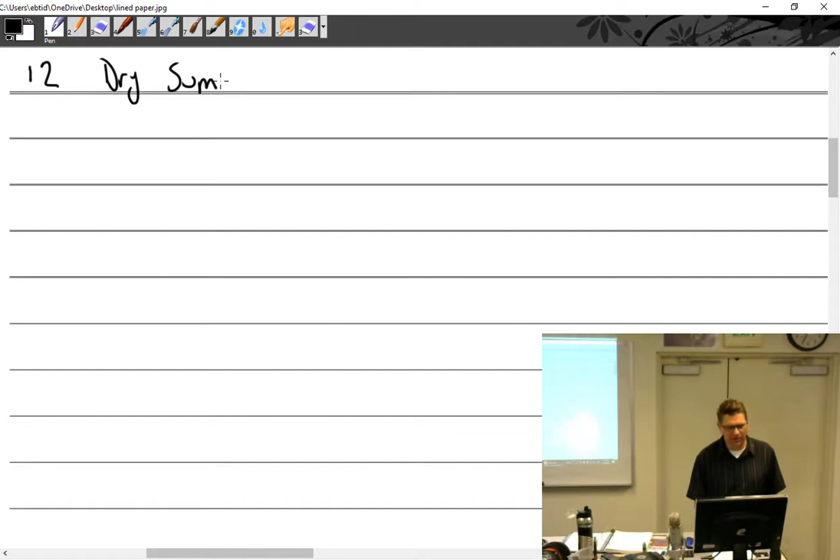We talked last week about the fact that a dry sump engine is distinguished from a wet sump. In a wet sump, all of the oil is just down below the engine in the sump. In a dry sump, you still have a sump, but you have a scavenge pump that scavenges all the oil out of it and sends it to a tank located usually on the firewall, a remote one. So the majority of the oil is not there underneath the engine.

We talked about reasons why we do this. Number one, it could be a radial engine. What's on the bottom of a radial? Cylinders, right? That'd be a bad place to put a sump. You have cylinders right there, or like the V-tail Bonanza, or some engines where the landing gear comes up next to it.

So we got that. Now, what about the oil tank? Dry sump engine, we'll just do this: oil tank.

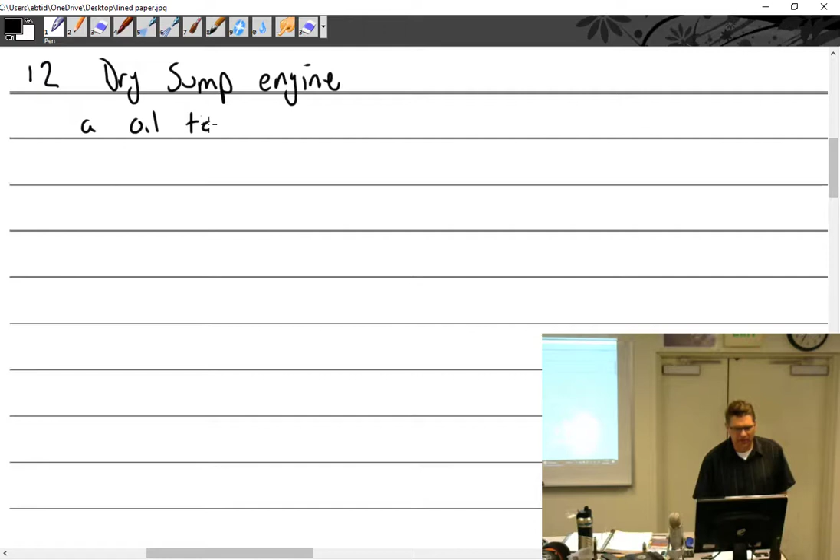Uh-oh, where's Janet? She was feeling sick.

Oil tank is mounted. What's that?

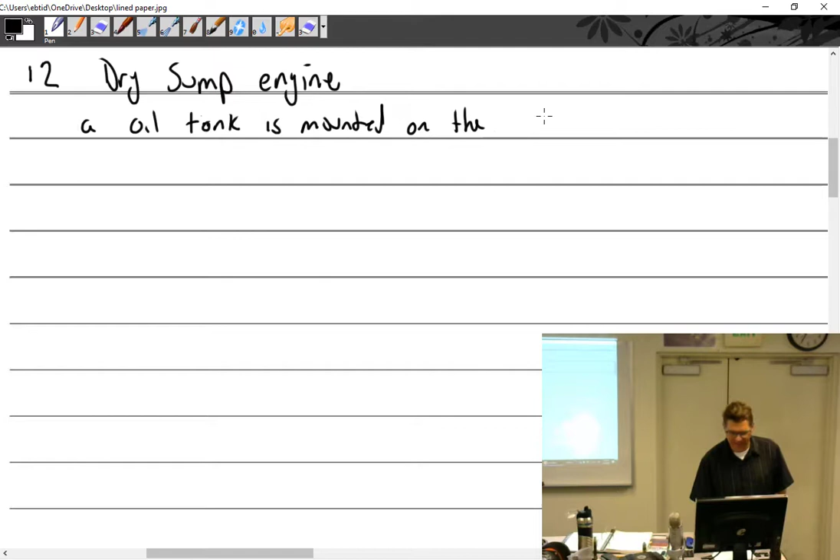Now you're going to be writing hella fast. I know, because you can just pause it. You can pause it, right, Janet? She's like, oh, yeah, I can.

All right, the oil tank is mounted on the firewall. Of course, you can have one for each engine. It's not just one big oil tank that goes out to multiple engines. That would be a huge mistake to do that, wouldn't it?

Why would it be a huge mistake if I had a twin-engine aircraft, like a radial - is that a Lockheed Electra or a Beech 18? It's a Beech 18. How can you tell? All I know is confidence is key.

So why would I not just, for the sake of simplicity, put one big oil tank right up front? You'd lose both engines. Single point of failure - if you lost the oil, you would lose both engines. That's good. What else?

It does not seem very effective to put it all the way up at the nose and have the engine on the wings. It doesn't make sense to pump it all the way down, across, and over. Any time you'd have a problem with an oil line, you could lose all the oil for both engines, and then you'd fly all the way to the crash site.

And the other thing is, what if one engine was going out? You're seizing up a bearing in it and making massive amounts of metal. That metal goes to the oil tank, and that oil goes to the other engine. So you want to keep them totally separate.

By the way, I watched a really good documentary this weekend about the search for Amelia Earhart. I thought it was going to be stupid, but it was really good, I really liked it. Was it on Hulu? Oh no, we have Disney Plus now too, that's where it was, I think it was Disney Plus. It was a National Geographic thing. Yeah, I paid for that too.

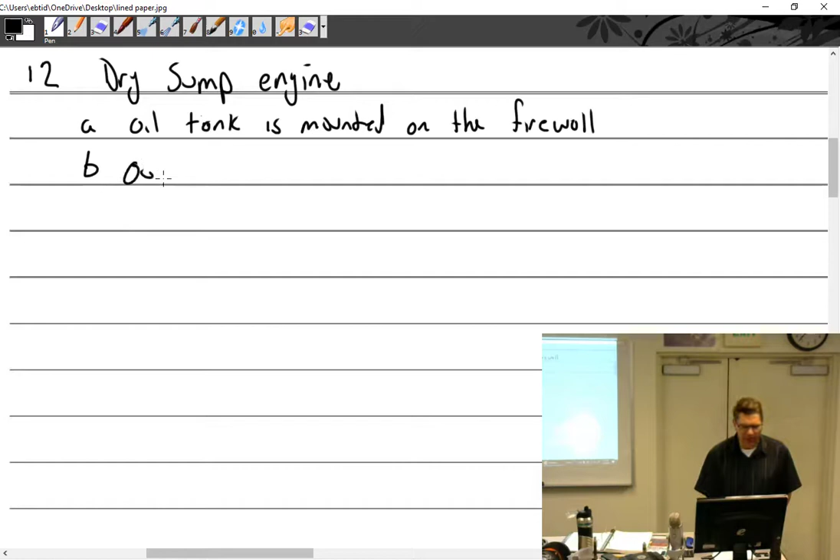Yeah, I think if you have Verizon, you get Disney Plus free for one year. I think that's only if you have the unlimited data plan. No, it's something on Unicom.

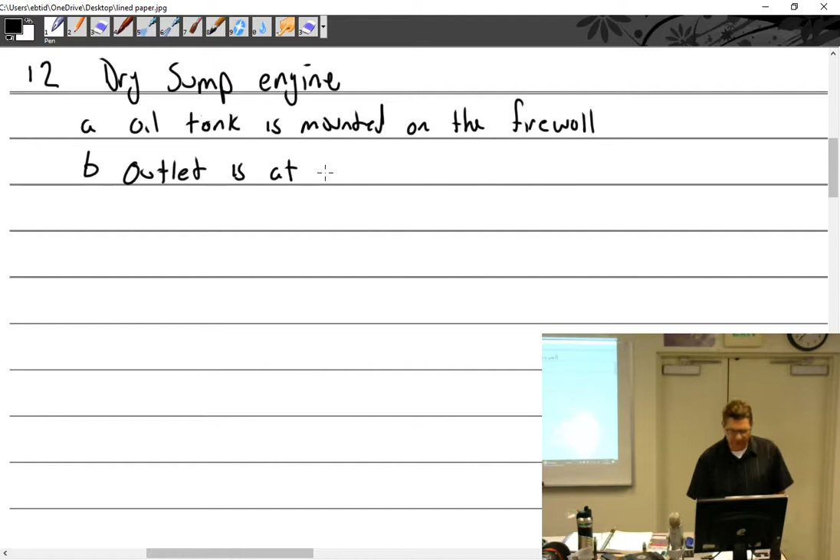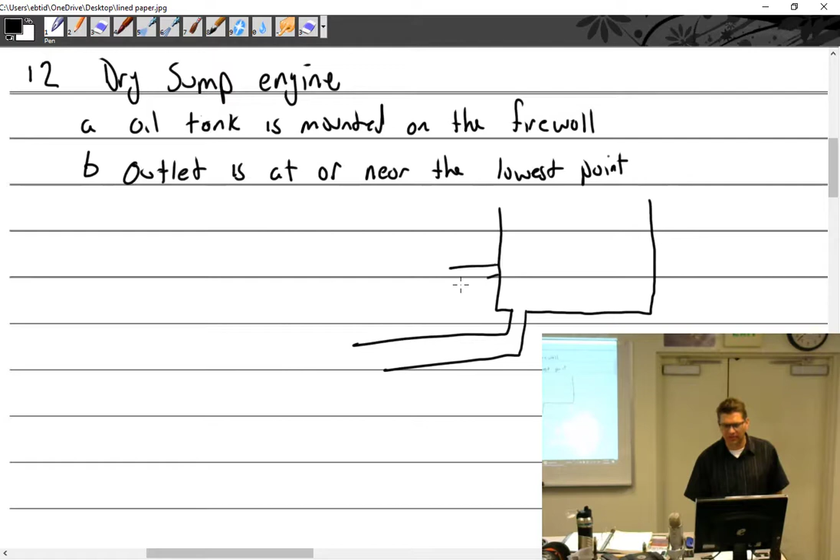The outlet is at or near the lowest point. If I have an oil tank, this is my oil tank, and of course we've got to have an outlet. It might make sense to have the outlet right here versus somewhere like this, because if it was up here and the oil level got down to here, we'd still have oil, right? If it was here, that would not work, so we can't have it there - that would be bad. So the outlet is at or near the lowest point.

Well, it's not always at the lowest point, believe it or not.

Some of them actually have a little pipe. This is called a stand pipe, S-T-A-N-D, stand pipe.

So that, in fact, when the engine sucks all the oil out - like let's say we had some sort of problem with the engine and it was blowing oil everywhere, burning it up - it would actually get all the way down to the bottom and leave a little bit of oil left in it. And the engine would run dry, but it'd leave a little bit of oil.

Anybody care to guess why in the world they'd want to do that? For the contaminants, the metal shavings and stuff that settle at the bottom. That was a pretty good thought, actually, but remember the theory: it's better to have really, really bad oil than no oil. Because at that point, you wouldn't really want to be thinking, well, the engine's destroying itself, better not give us some bad oil too - it'll really make it bad.

This is kind of an obscure thought here, but you got to start thinking about this stuff, the entire system. So what drives the propeller, the constant speed propeller, on engines? I've mentioned this - engine oil is what changes the pitch.

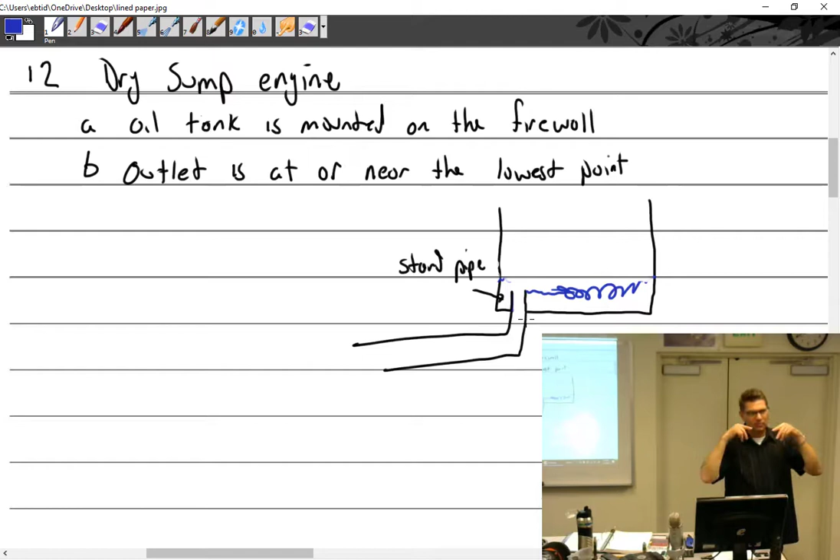So when I turn that engine off, I want the blades to be rotated so that they're aimed right into the wind and they will come to a stop, just like little wings sitting there. And so there's nothing. But what drives those propellers to feather in some aircraft...

...is it has a secondary pump in it, so it would have another outlet to it. This would be specifically for the Hamilton Standard type. It's going to go to another pump that goes to the prop, so prop feather pump. So it needs just enough oil to run the feather pump, and so what it does is it's got a secondary pump that is going to act as the feathering pump - it's just going to run the pump.

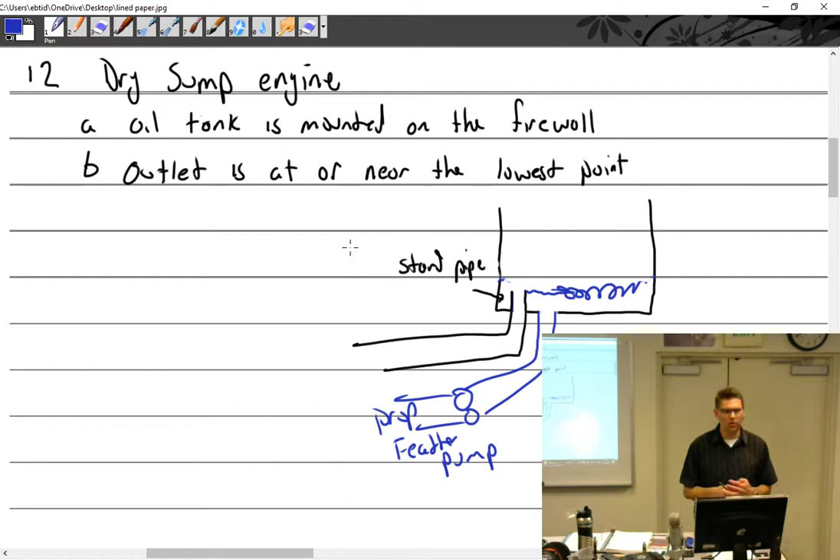We'll talk about this next class. And it needs that oil to drive the propeller to feather, so you want to save just enough for that to happen. But not all aircraft - most twins are designed that if they lose oil pressure, they automatically go to feather, which would be a much better idea, right?

Okay, so the outlet at near the lowest point - this we talked about, a second outlet. Second outlet, where am I? Below the normal outlet. The normal outlet. Maybe, let me see, may be provided for the feathering pump. We'll just say that for the prop feathering pump. That's enough about that.

So, is there a different plug to drain that? No, you can put a plug right here - this is the outlet plug. You would put the outlet plug all the way at the bottom.

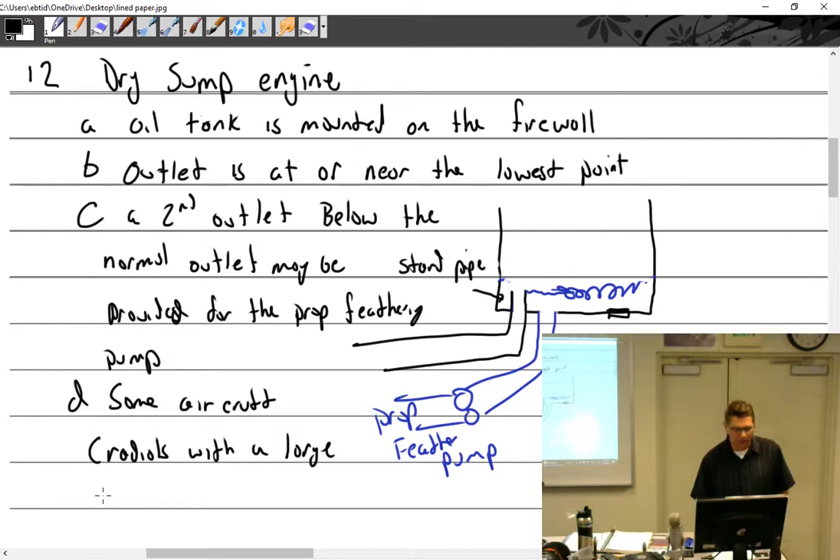All right, let me see what else we got here. A, B, C, we'll make this D then. Some aircraft - and this would typically be radials with a large oil supply - are going to have something called a hopper. I'd call it a hopper, or temperature accelerating well.

And when I talk about large quantities of oil, like I said, one of the smallest radial engines out there is the Continental 220 on a Stearman. There's obviously much smaller ones, but that's just like the common smallest one, a 7-cylinder radial. That one uses 6 gallons on the Stearman.

So you do an oil change, it's 24 quarts. That's a lot of oil. The tank contains 6 gallons of oil, and it takes a long time to warm up 6 gallons of oil, especially if you're in a cold climate.

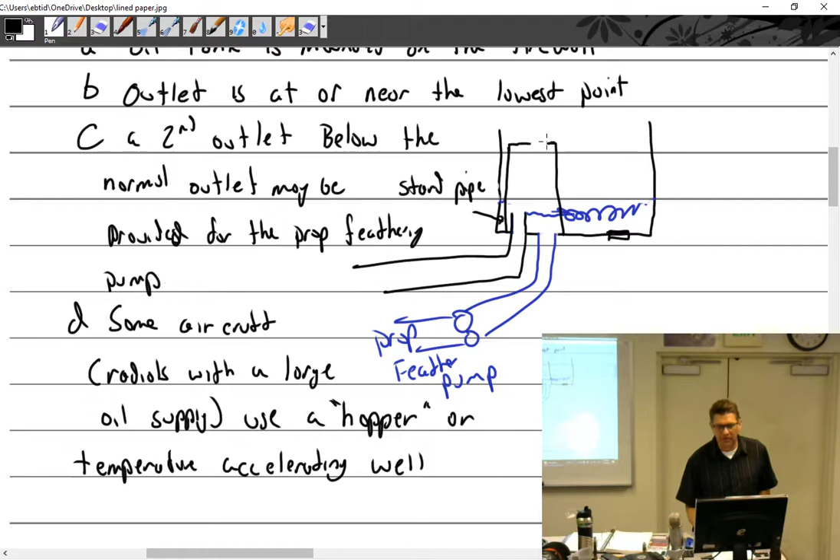So rather than having to heat up all of this oil, what they have is a temperature accelerating well, which would basically look like some sort of can. We'll leave it open on the top, well, we'll put holes in it. So with a lot of little holes in it, oil is free to move about in and out of the can.

If you took a coffee can, or even my water, don't do it to mine, and drilled a bunch of holes in it, and then had the oil return line coming in and going down into here. All the oil fills this up, and that's hot oil, and the hot oil goes this way. So I'm using a very small quantity of oil in that hopper, but yet since there's holes all over the place,

as the oil starts to warm up this can, it's going to warm up the oil around it, and that's going to allow the oil to come inside these little holes and join its friends, and pretty soon the whole tank is at the same temperature. But in the meantime, the hot oil comes back in the hopper and it sucks it out of the hopper.

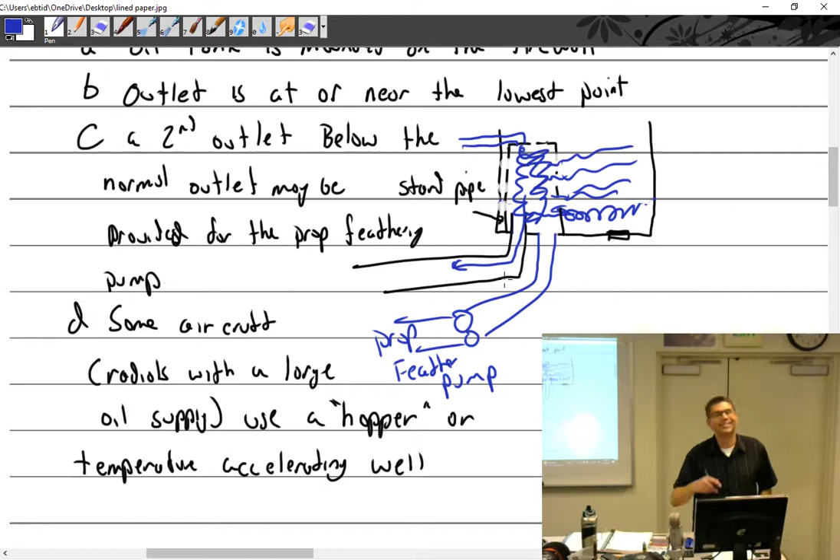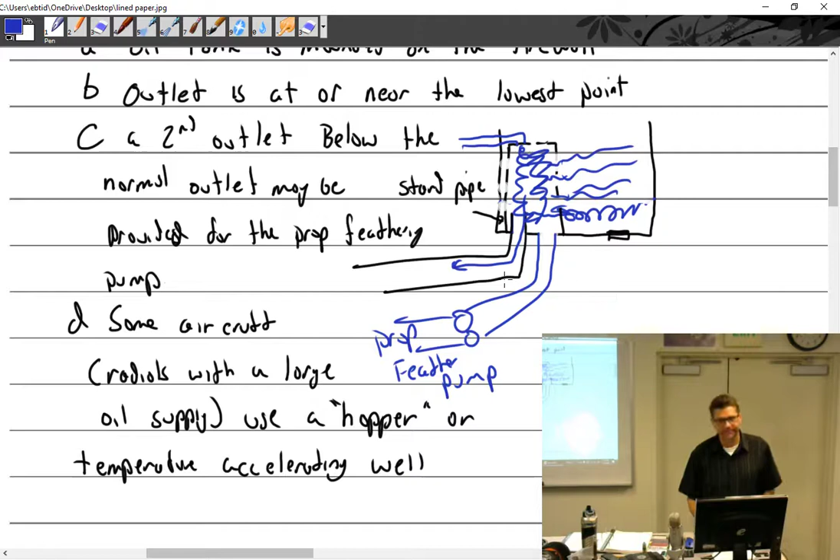It's not what it's called, the jacket, right? The jacket is different, it is actually different because the jacket goes on an oil cooler. That's a terrible looking drawing, I messed it all up. Anyway.

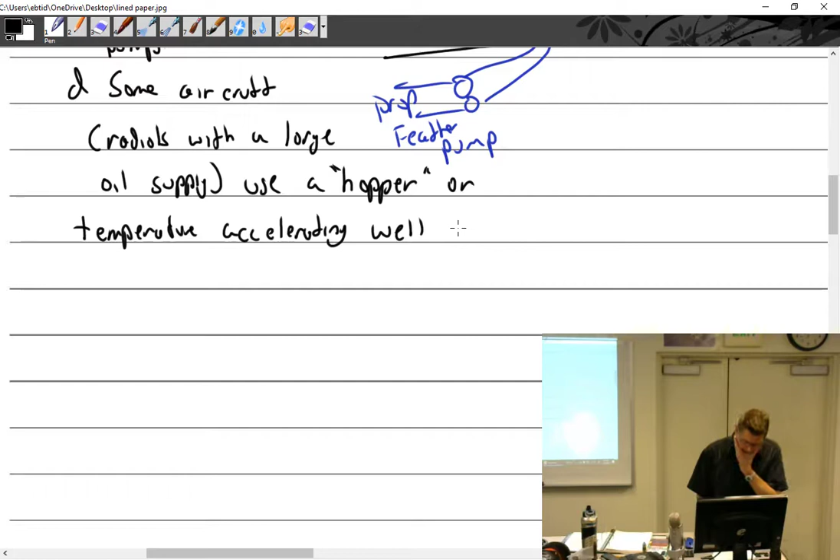So temperature accelerating well. Let's see, I could add some points to that. Let's see, we could add that a Stearman, S-T-E-A-R-M-A-N, Stearman with W670 holds 6 gallons of oil, and that's a small radial.

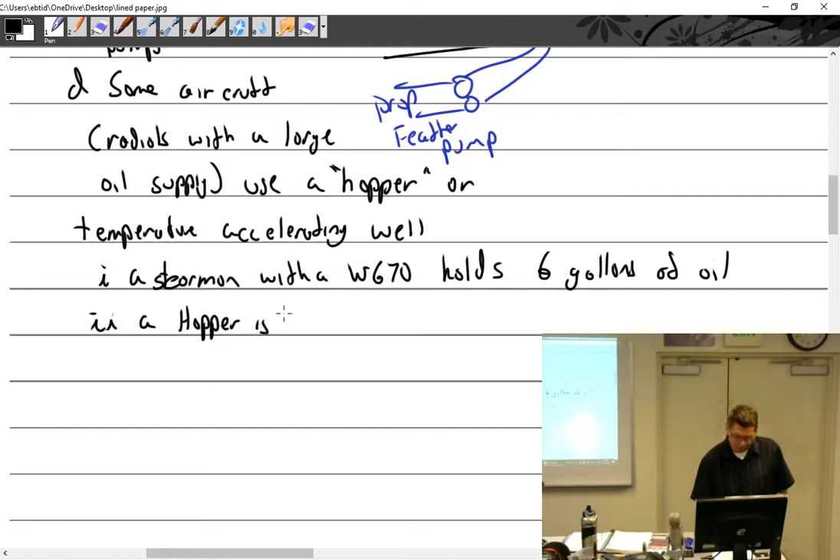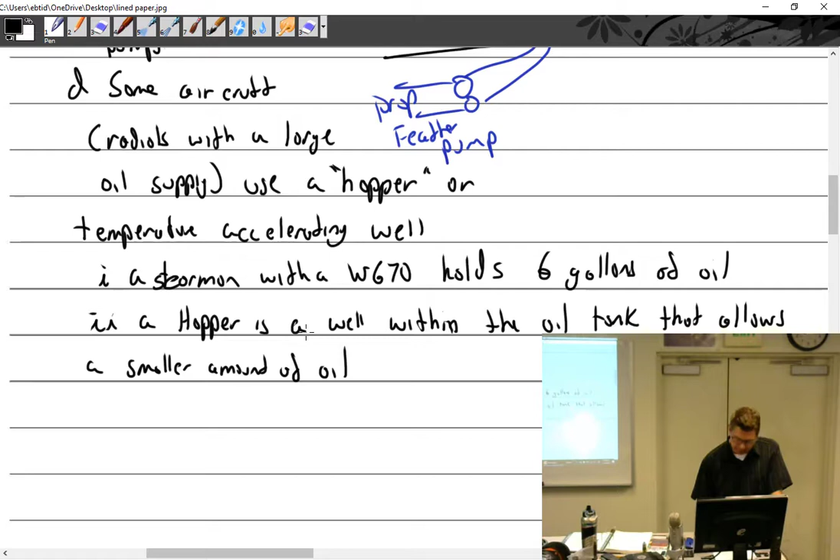So a hopper is a well within the oil tank. Within the oil tank that allows a smaller amount of oil to be used, I hope this works out, to be used in the engine warm-up during

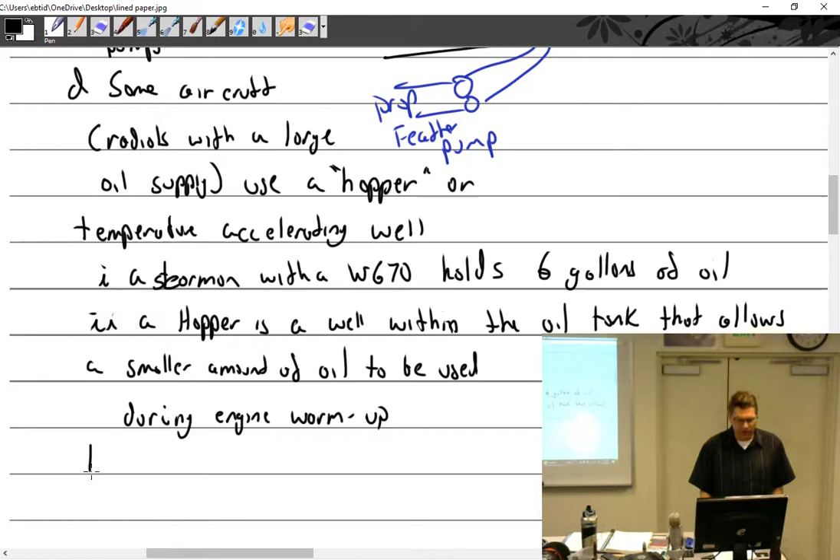engine warm-up. How's that work for you? If you don't like it, you can change your wording. Because you want your oil at temperature before you take off and start flying, especially in these air-cooled engines. But you know what, it takes a long time for the oil temperature to come up. My little airplane only holds 6 quarts, and it takes seemingly forever before the needle starts coming up.

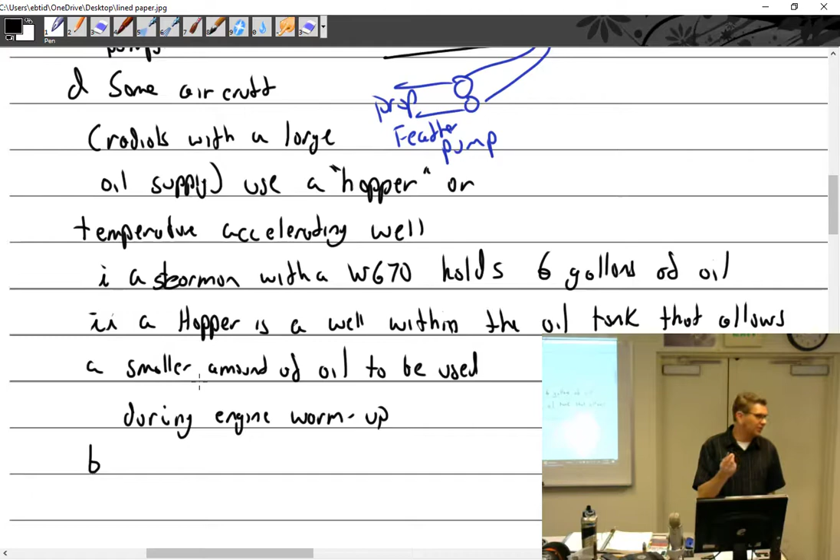And so can you imagine how long you have to sit there at the end of the runway in Alaska waiting for 6 gallons to warm up? Or heaven forbid it's a much larger aircraft and you're waiting for 8 or 12 gallons for this thing to warm up. It takes forever.

So do they have tank heaters? Not that I've ever seen. Well, I don't want to say no. Okay, yes, you can buy aftermarket heaters. It's just like, well, I was going to say it's like a waterbed heater blanket. It looks just like that, but you guys never had a waterbed. I did, that's how I set my house on fire. That's a whole other story I'm not going to tell.

Well, I've seen them, they're like magnetic, and they wrap around, and they plug into the wall. Yeah, you got to have a long extension cord. Or you can wire them in.

All right, let's see, I was going to put the something. Let me see, the warm oil. How about that, the warm oil then warms the remaining oil. There we go.

I don't think I need to go on from that, but the oil coming in then has within the little hopper, it wants to stay in there. It's warm, and then it warms up the oil surrounding it. And that oil then kind of comes into little holes, and then the whole thing works as one big tank that is working.

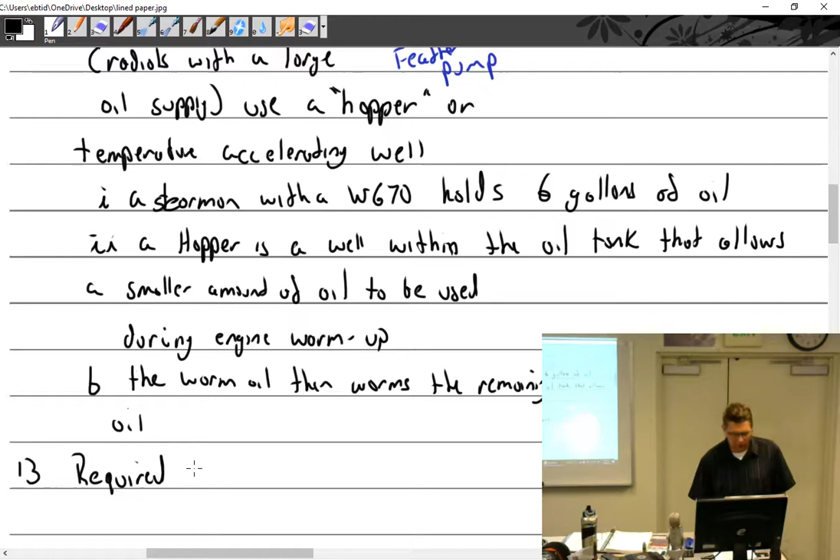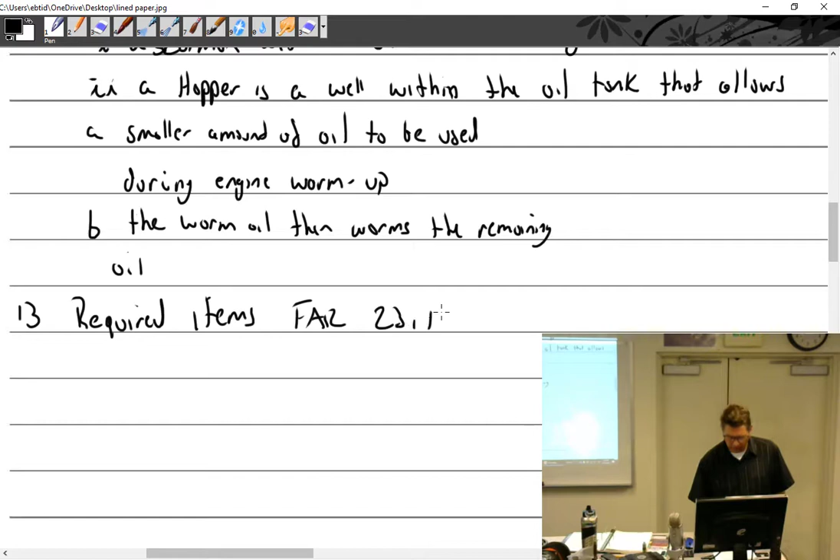All right, let's do required items. Required. Was that 13? I don't remember. Yes, 13. Required items, according to FAR 23.1013. So FAR 23 has changed quite a bit, I really don't want to get into this too much. Some of these references that I'm pulling out of that FAR, especially 23, have changed. For the longest time, everything was just written down in the FARs, and now we're getting into a whole different set of how aircraft are made.

So, for example, it used to be if you want to make an aircraft, you'd open up FAR 23 and go, okay, we got to have this, and we got to have that, because it says so right here in FAR 23. Then there became a change where, using a whole different set of standards, you can make an aircraft, and as long as you can prove to the FAA that it meets the safety requirements they've set up, it's good to go, and you don't have to follow all these requirements. So I probably need to update this and start pulling some stuff out. But a lot of aircraft were made under Part 23, and they were required to have certain things when they did it. And as far as I can tell, the FAA Q&As have never acknowledged this fact. They'll still throw in things like, what must you have, like the things I'm going to talk about now. You still have to know this, even though you may look it up in FAR 23 and it doesn't even exist anymore.

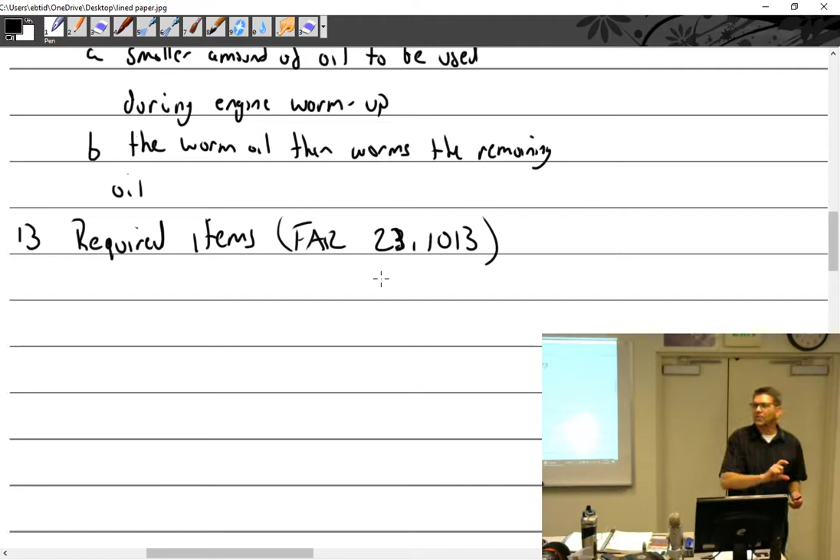Just know that we're going back in time a little bit, and some of the FAA questions haven't caught up to the new standards, so you have to know this kind of stuff, what used to be. I think this is an actual Q&A right now. So according to FAR 23.1013, what are the things that you must have in the oil system? What must it have?

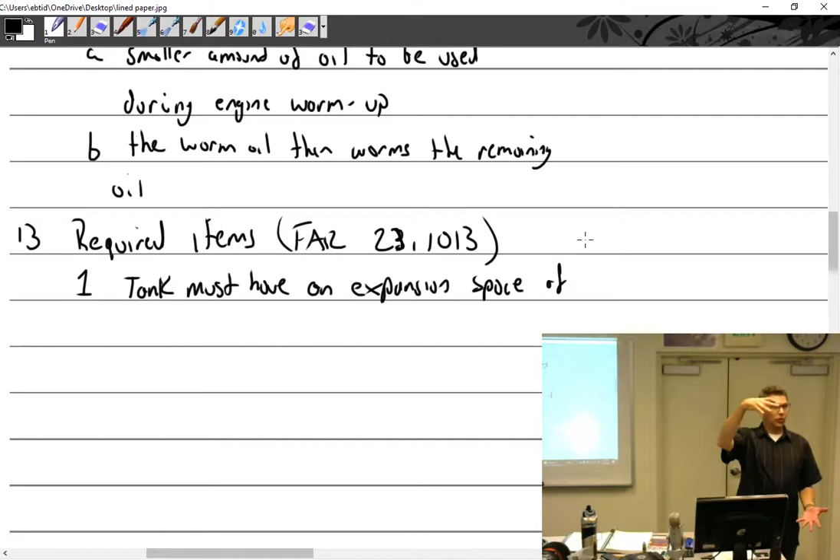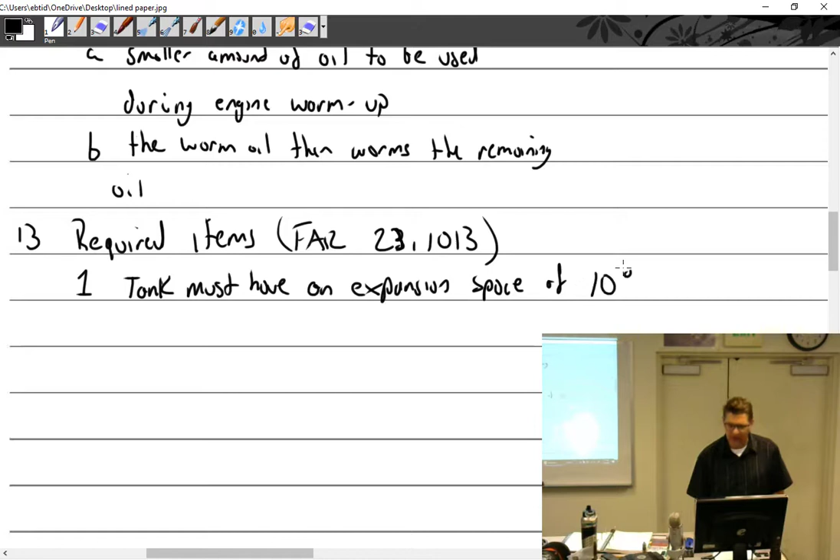Well, one of them, you must have an expansion space. So the tank must have an expansion space. Well, what's an expansion space? There you go, for the oil to expand. Well, what was it going to expand from? Temperature change, it's going to grow. Foaming, there we go, gets all foamy. You get air inside there, it's going to foam, it's going to expand. You don't want it pouring out all over the place. Number one, it's a fire hazard. Number two, environmental concerns, but we don't care about that, right? But you want to have this expansion space so when it foams, you still have a place to store it. So how much expansion space? 10% or 1/2 gallon, whichever is more.

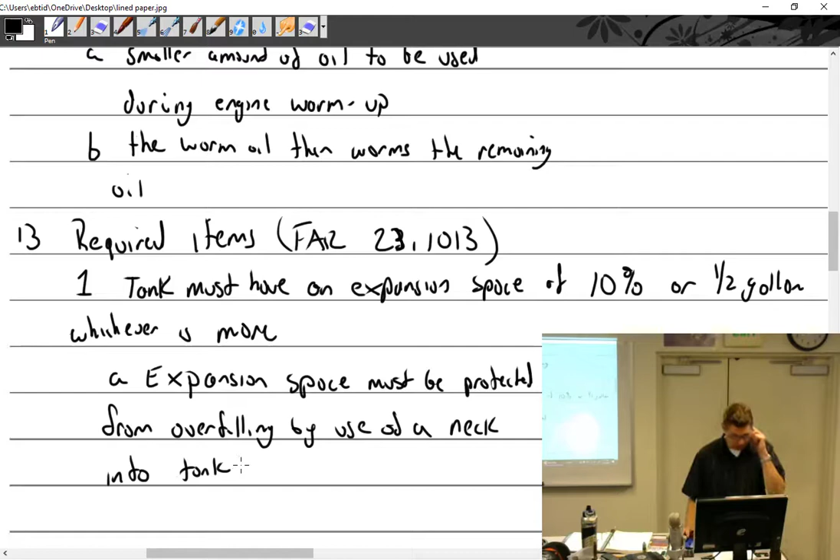And for some reason I felt the need to put this: an expansion space must be protected from overfilling by use of a neck into the tank, which is to say that the top of the tank—grab the tank—here's the filler. By the way, the filler is almost always yellow. You have the cap, but you can't just fill it all the way to the top and say, well, there it is, it's full. There's going to be a neck that comes down like this so that the oil is going to be full right up to here, and this is the expansion space up here.

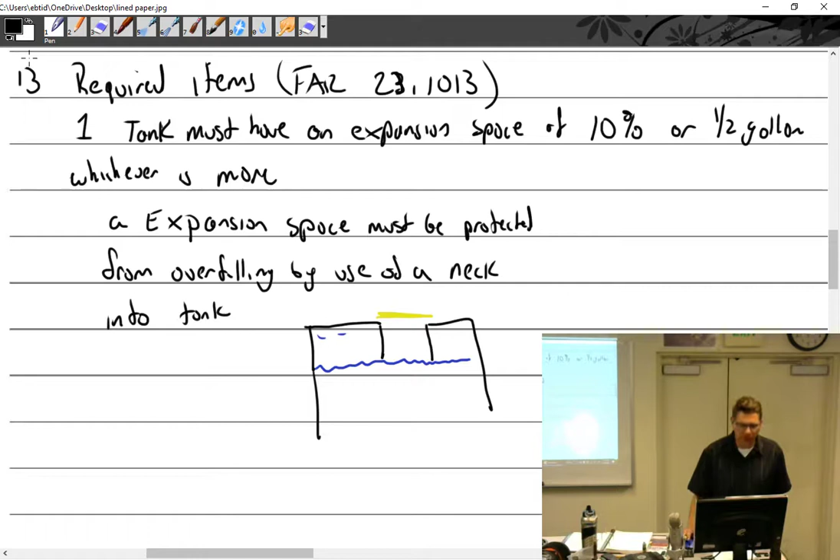Otherwise, you get in the situation I had in my last car, where I brought in oil to have them change it since they were working on my tires anyway, and they said they could do it. I had 2 cases of oil in my trunk, and when I got home, I said, where's my 2 cases? And they said, we put it into the car. Why would you put 2 cases of oil into a guy's car? Because we couldn't find the dipstick. Well, I was sitting right there, why didn't you ask me where the dipstick was? I would have gladly pointed it out. What's that, one of those BMWs that don't have it? It was a Mercedes that didn't have it, it was on the steering wheel, you just pulled up the menu. That is so stupid. I don't understand, what's stupid? Not having a dipstick, or the people who just poured everything into the car because it was there? Pretty much both, yeah.

Okay, we have 2. It must have a vent. Must have a vent.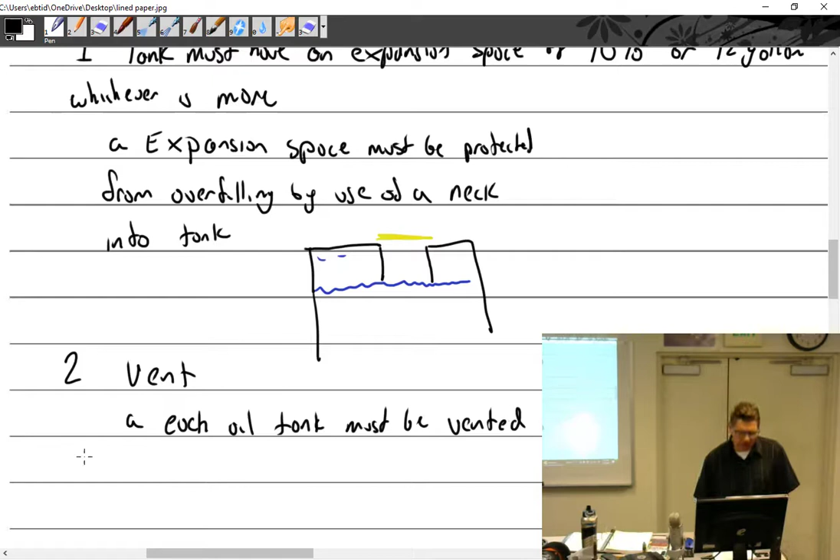Each oil tank must be vented to the engine from the top part of the expansion space, which makes sense. Each tank must be vented to the engine - that's good enough.

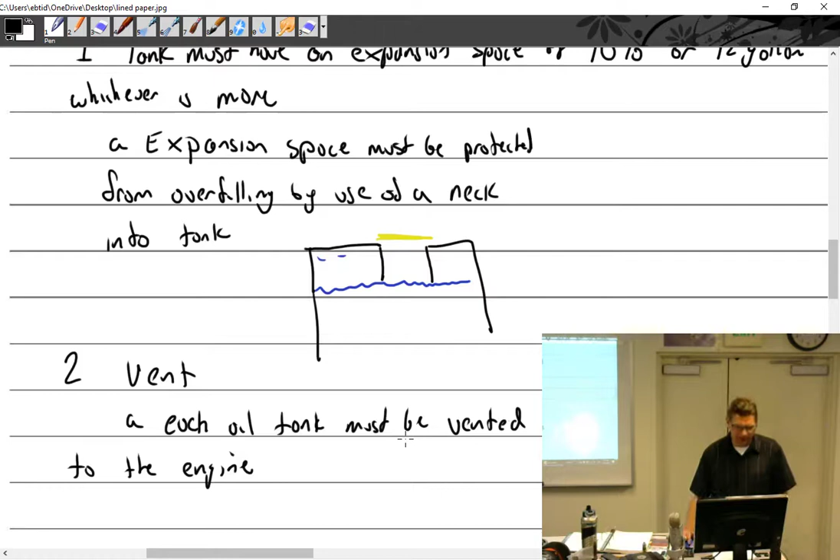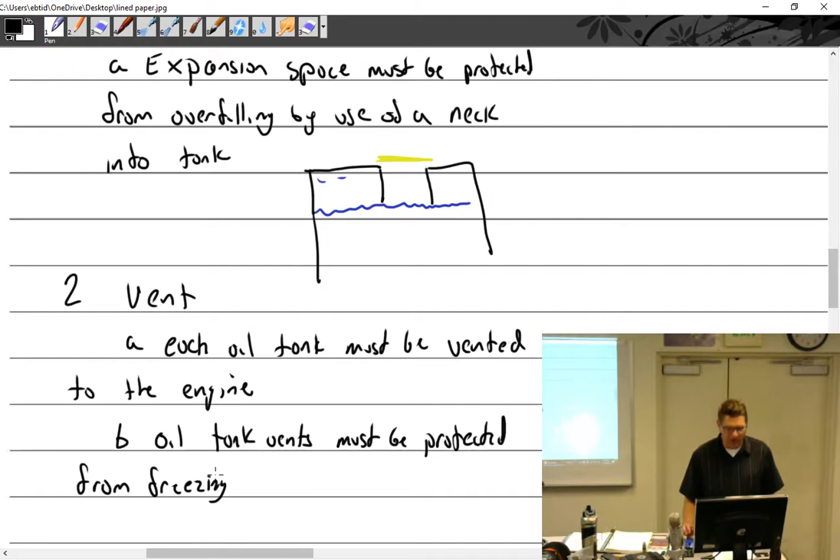What else? Oil tank vents must be protected from freezing. That would be bad. Oil tank vents must be arranged so that condensed water vapor that might freeze and obstruct the line cannot accumulate at any point. So we want to protect from freezing.

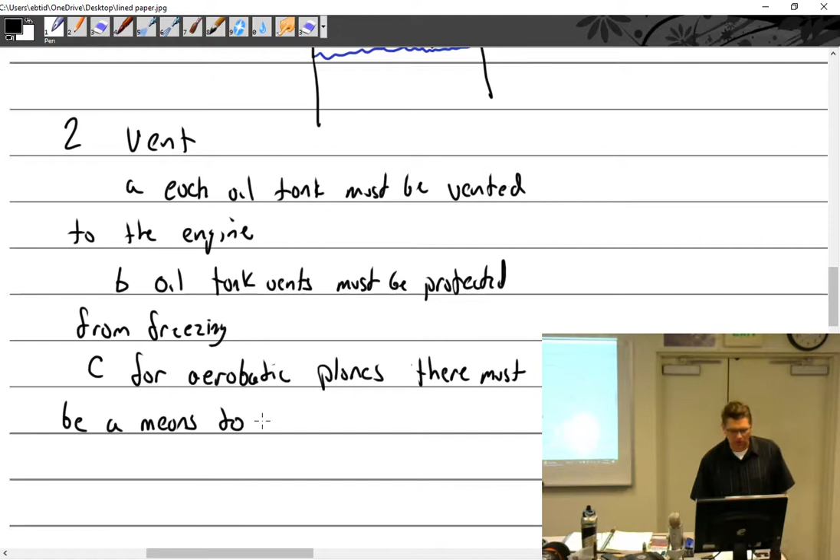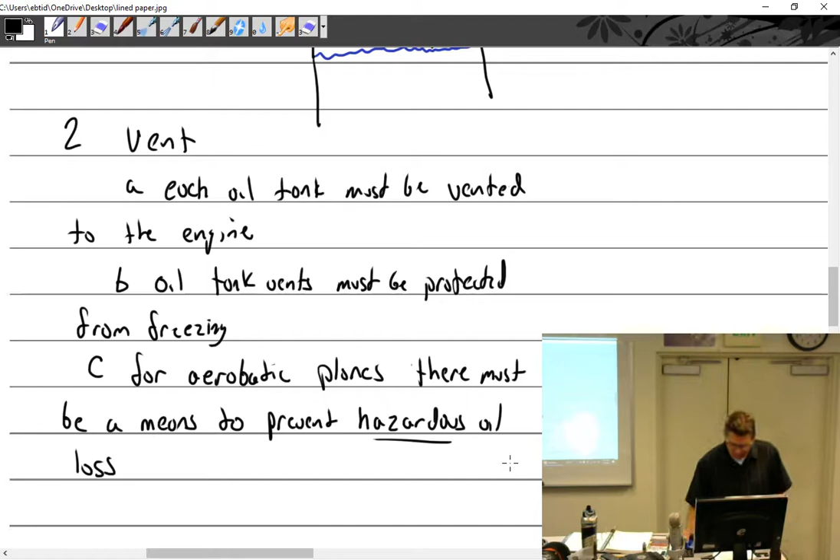And for aerobatic planes, there must be a means to prevent hazardous oil loss during aerobatic maneuvers, including short periods of inverted flight. So it's fine if it loses a little bit, that's why I put the hazard word there. I guess you can lose a little bit - what's hazardous? A lot, whatever makes the plane inoperable.

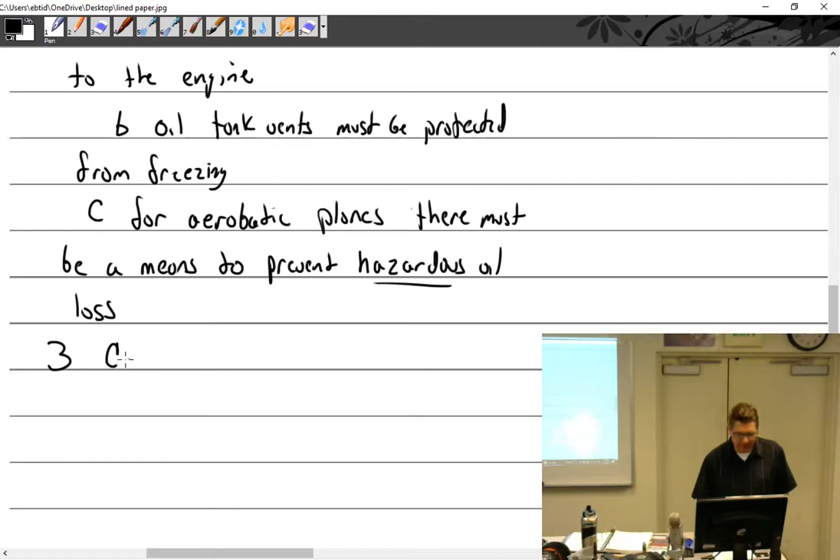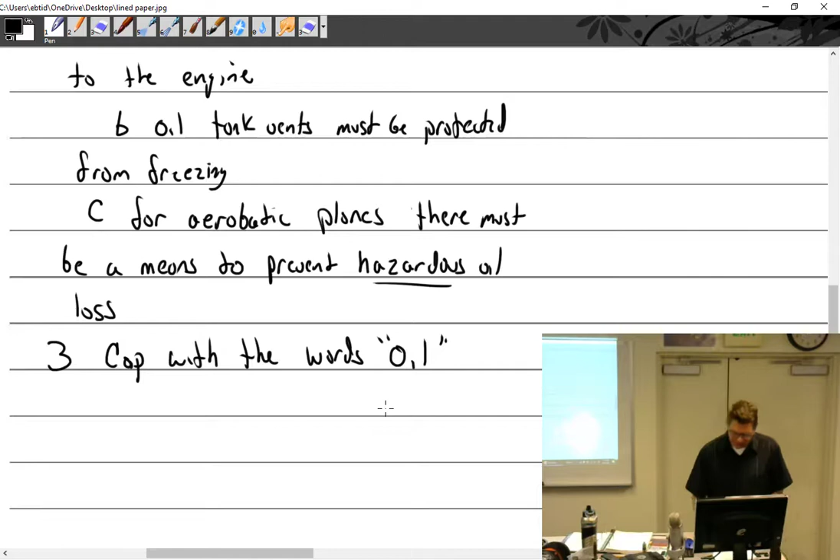Must have an oil cap, with the words... what are the words going to be? Oil - well that's a word. Oil cap, the words 'oil'. Also the grade - what does grade mean?

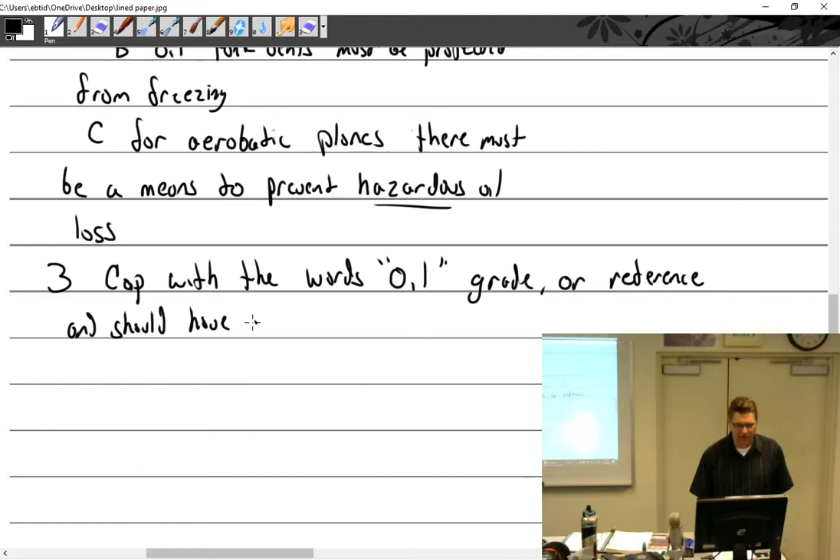What kind of weight should go in there? Grade or reference, like oil per the pilot operating handbook. I wrote this, and it should have capacity, but that's not required. So you could either have oil or grade or reference - must have the words oil and a grade or reference.

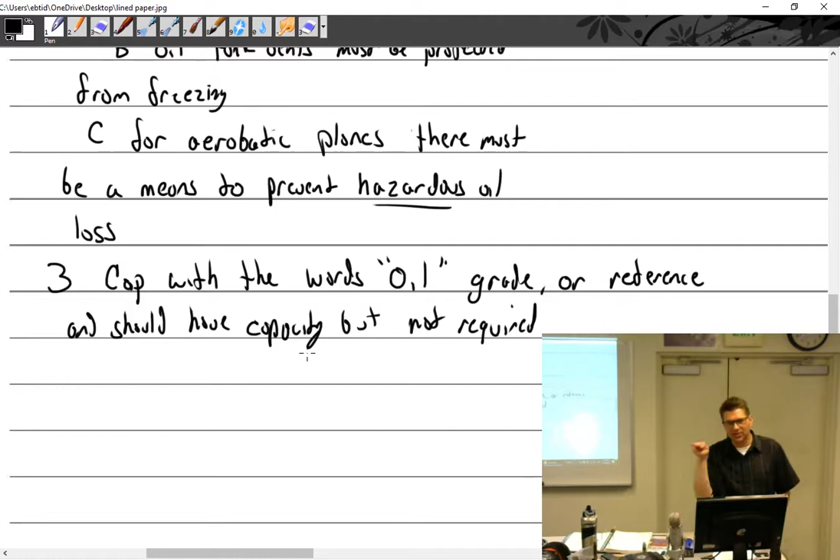So like oil, 20W50, or oil. Actually, my aircraft, when you open up the little oil door, there's a sticker right there that says oil on the cap, and it has the quantity. But then there's a sticker on the oil door that says reference to the grade - it has temperatures, and then just between this and this is 80, this and this is 100.

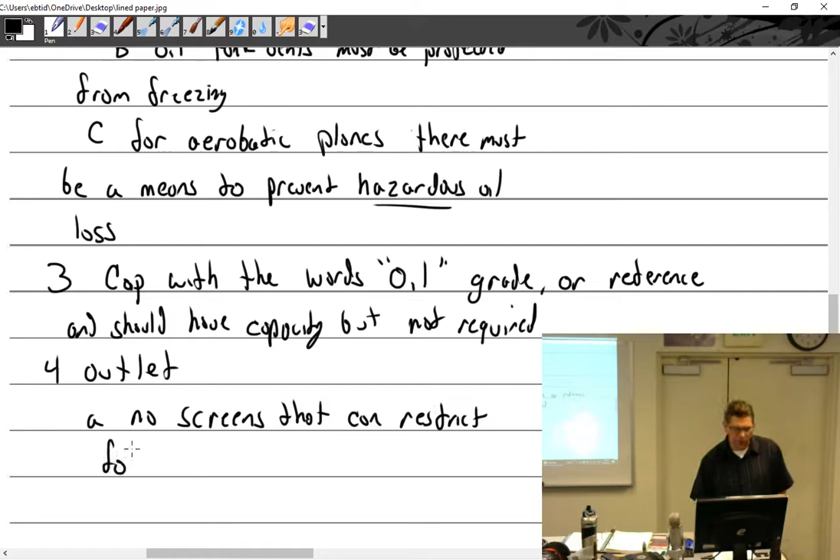Outlet: it must have no screens that can restrict flow to the engine. And B, outlet diameter must not be smaller than oil pump inlet. That makes sense, right? It does to me - than oil pump inlet.

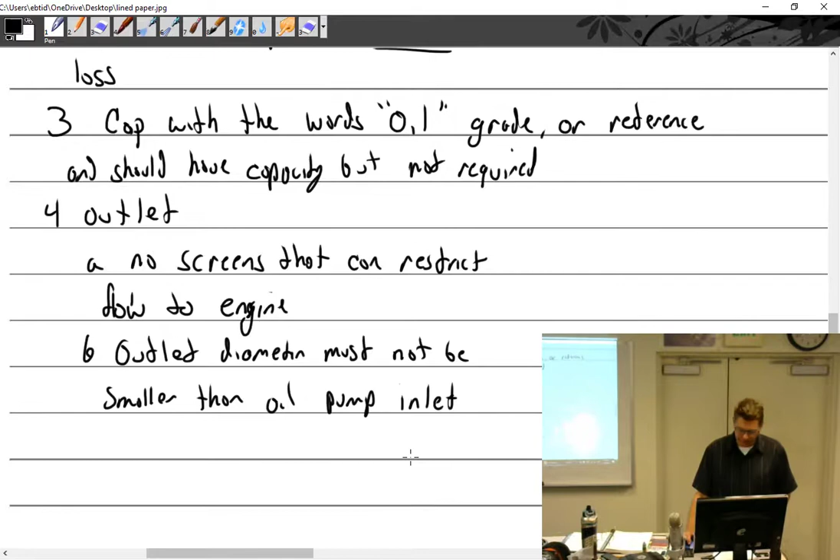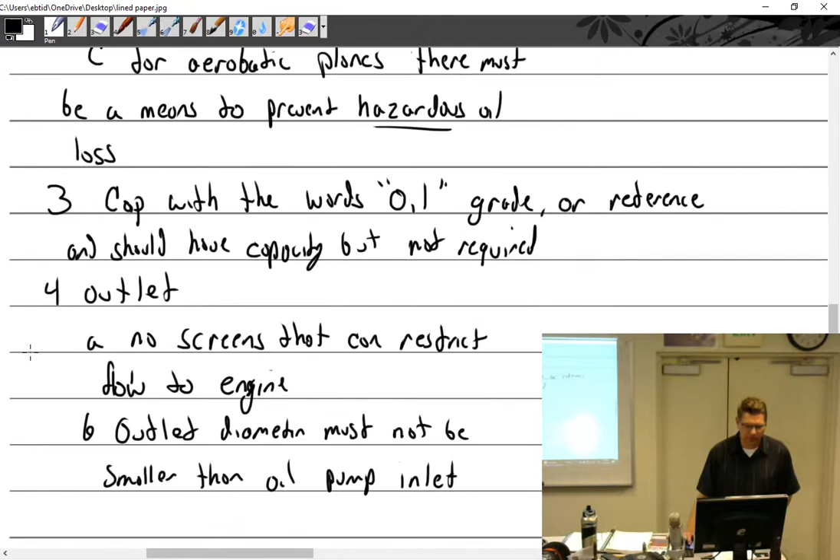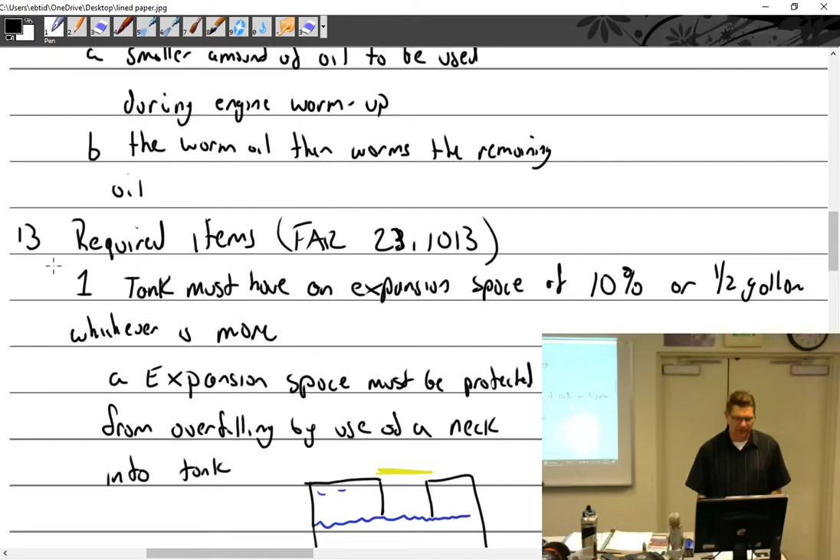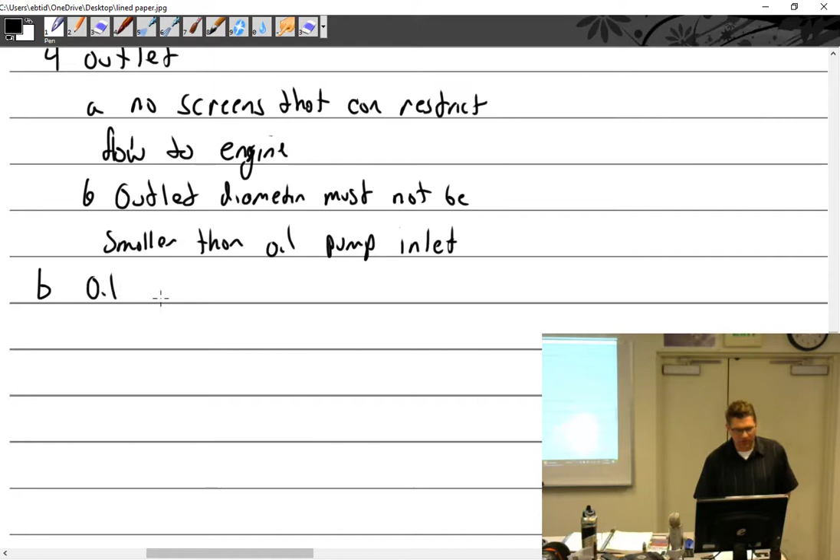I'm trying to figure out what to make this one. Well, if we made this A, we talked all about the oil tank, then I can make this one B - I don't know why. I can call this the oil temp gauge.

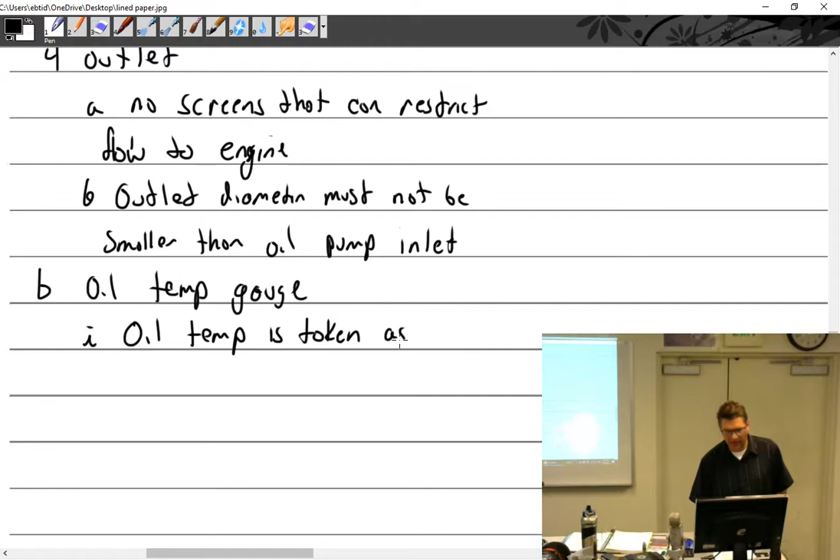All right, oil temp is taken - I think you have a lot of Q&A questions about where oil temp is taken. It is taken as oil enters the engine. So you're going to have all these oil pump questions, and the thing that really is going to get you through them all is to realize that they divide it up into two: wet sump, dry sump.

If you go talking wet sump, then we have to think about, well, the oil is all kind of integral, and they do not put the oil temp bulb down in the bottom where the oil is sitting in the sump. So what you want to know is where the oil temp is right before it gets into the engine - that's what's important. And the reason why they want to do that, we'll just say it this way, it's probably not true, but we got to think about pilots, right?

So I am one, so I can talk about pilots. And who's pilots besides me and Steve and Harry? Oh that's right, and PK. Well, we'll divide the room into two: there's pilots like PK and Harry, and then there's pilots like Steve and I, right - guys that fly our little 150s. So guys that fly 150s, not the brightest group... yeah, I want to be in that group. Right, and so when they build their airplanes, they don't want to scare guys like us because we're just not that bright. And so if we saw the oil temp getting too hot, we would panic, right? And then the poo would come out, right? And they don't want that, so they lie to us, right? So they want to tell us a little fib, make us feel better about everything - it's going to be fine, don't worry. So the way they do that is they tell us the oil at its coolest point before it gets into the engine.

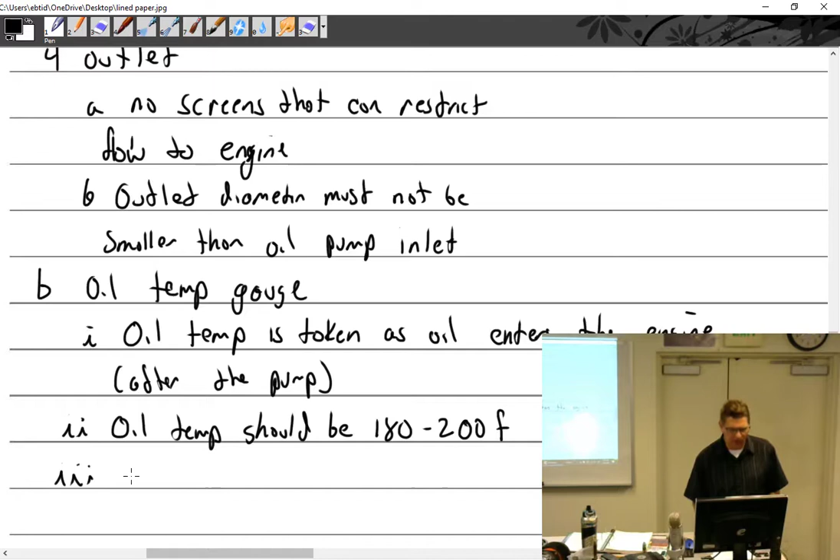Now what oil temp is that? In the engine, inlet, after the pump, is what the gauge tells me. All right, so my oil temp gauge should read 180 to 200, and these are generic numbers because every manufacturer could be a little bit different, with a max red line of about 240. All right, why? Well, there's a couple of things.

So I think I've told you this story, and I'll make it quick, but yes, I did. So the worst thing you can do to an engine in the wintertime is what? Take off before it can heat up. Fly without cold oil?

Well, let me tell you. So it used to be common, maybe it still is, I just don't notice. Especially where I was out at Clarksburg. People who didn't know, because it would get foggy out there in the wintertime, and it's a grass runway right next to the river. And as the river water would come up during the when we used to get rain - you guys wouldn't remember that, you're too young - but water used to fall from the sky.

And I know it sounds crazy, and the river would get really high. In fact, they would actually have levee patrols looking for breaches and stuff. Well, over at Clarksburg, because we're right next to the levee, the far end of the runway, the west side of the runway, the water would come out there. And so we'd have less and less runway. You'd get to a point where it was just flooded down at that end, and it was grass, so people around there, we couldn't fly a whole lot.

And even over at Executive, the Tule fog would set in for days, weeks, months. So people aren't flying, but they love their aircraft, so what are they going to do? Well, I'm just going to go down and run it up real quick. Right? So you get an airplane, you start it up, you just run it a little bit and warm everything up, and then shut it down and go home. Well, what you're doing is, think about your engine.

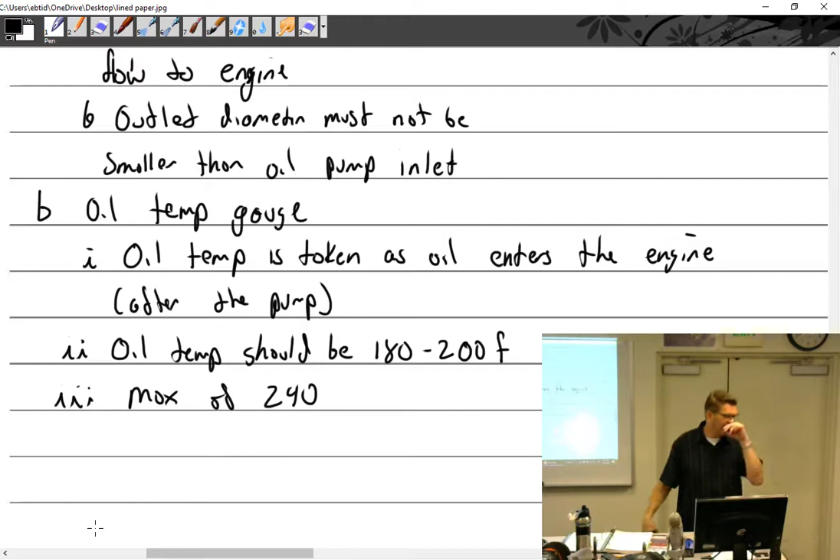It's this case, this crankcase, right? And so there's all this air where your crankshaft is, you have your sump down below. So you start it up, and you warm up all of that air that's in the crankcase, and the oil gets a little bit warmer, and that air expands. The hot air expands and it goes right out the breather. So you guys, because your engines are actually modified ground power units, most of them, you don't see that the breather for all the aircraft engines is just a big hole right up front with a little pipe that comes around.

It runs just to kind of by the firewall and down. So you have this breather, that's all it is. It just blows in, so the air expands, heats up, the hot air expanding goes out the breather. Then you shut down, and everything starts to cool and condense, and that air starts condensing. And so what does that condensed air inside the crankcase do? It needs more air, so it sucks it right up that tube, right back in, all that nice, fresh, wet air. And so what you do is you bring in a load of wet air, right? And so then it sits there, and it gets in the oil, the water goes into the oil, permeates everything.

Then a couple days later, you come and do it again. Now you need a fresh load of wet air to come in. You get a fresh load of wet air, and it just repeats this process over and over.

So they say you should never just go out and run your aircraft up, right? You've got to get the oil up to operating temperature. So if you can't run it, just leave it be. Some people used to say, well, go by every few weeks and pull the propeller through a couple times. But what you're really doing at that point is wiping whatever oil was on the cylinders off, and that was bad too. So they say the only good thing is just fly it.

All right, but after flying, the engine becomes cold again and sucks in moisture. So now, yes, you want to fly it. Well, doesn't that do the same thing? Yes, it does. But if you get the oil up to at least 212 degrees, what happens to the water that's impregnated the oil? It boils out and cleans it all out. So there you go. So your oil needs to get up to 212 degrees. But wait a minute, I just said 180 to 200. That's at its coolest point. So why is water going to boil out of that?

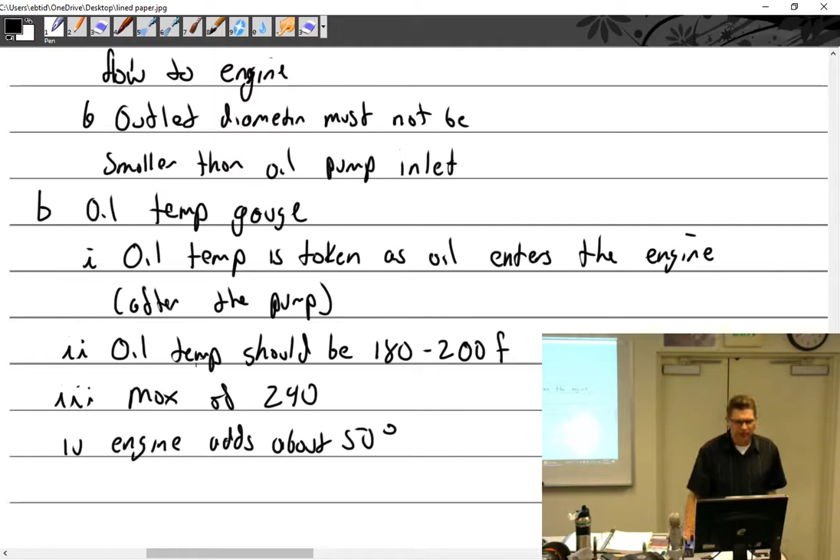Because it's on the inlet. Yeah. So how much hotter is the oil going to get? That's the thing they don't want Steve and I to know because we get scared. Hopefully not more than 240. The engine adds about 50 degrees. So here's the thing, I tell you, if I did this once, I did it dozens of times, which is to say I did it dozens of times.

This scenario would often play out with a customer calling up and saying, hey, do you guys do engine overhauls? Yes, I do. I think I might need an engine overhaul. Why do you think you might need that? Well, I'm having a real problem, the thing is just running so hot, I don't know what to do anymore. Well, the first thing is, we're going to get around to this, but it's worth pointing out right now.

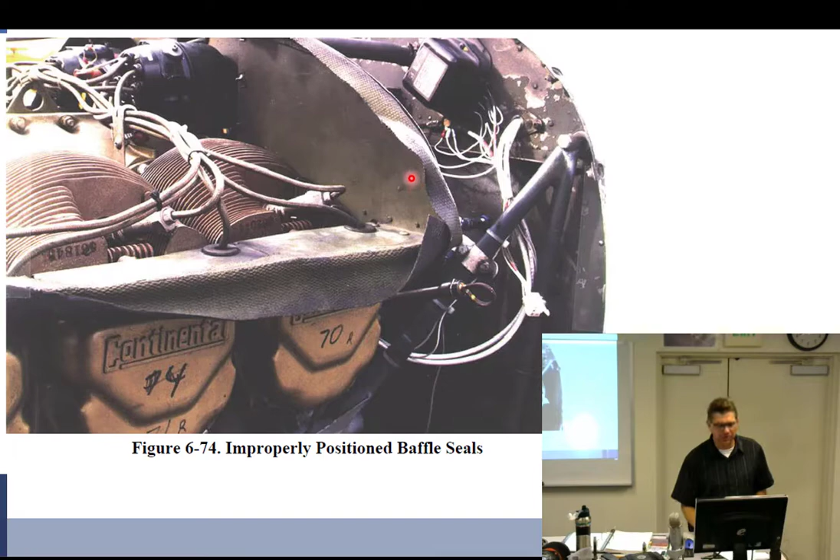Engines are air-cooled, right? And they have this rubber seal that goes around the engine right here that's supposed to sit very tightly against the cowling and force air in the front of the aircraft, across and down the cylinders and out. I have seen, this is horrible, that's what this picture is representing. Absolutely awful, worn out, this is sagging down. All the air is just going to go through it.

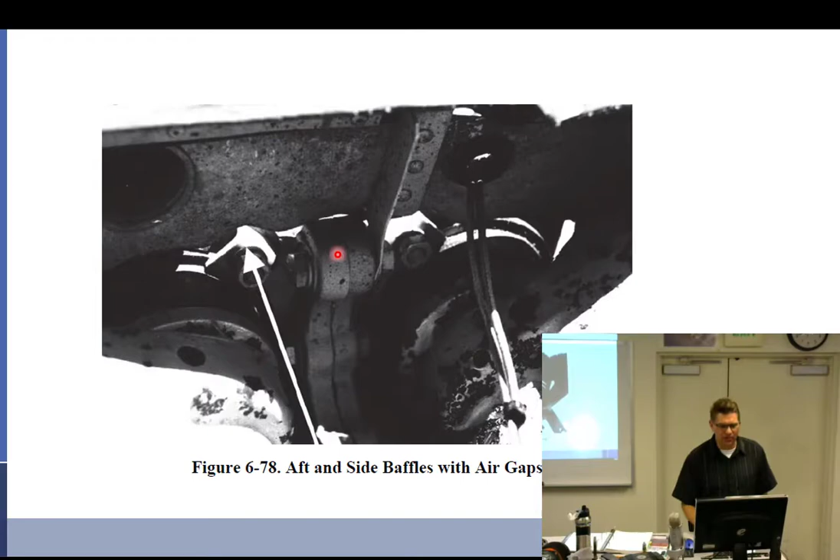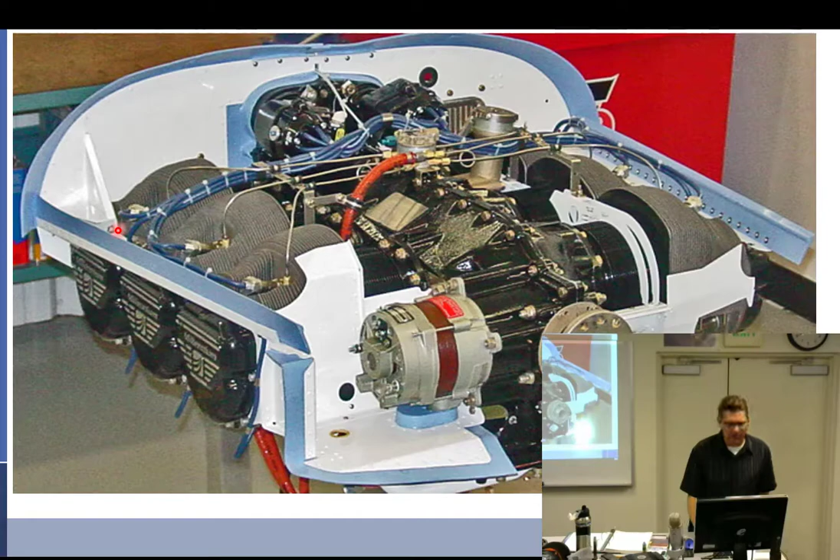It pushes really hard against the cowling. Like Jace, you were with me when I had to pull the cowling off. I was putting mine back on, and I made a comment, right? I said, yeah, it's not easy to get back on. If it was, that would be a problem. It's got to be hard, it's got to be pushing against that.

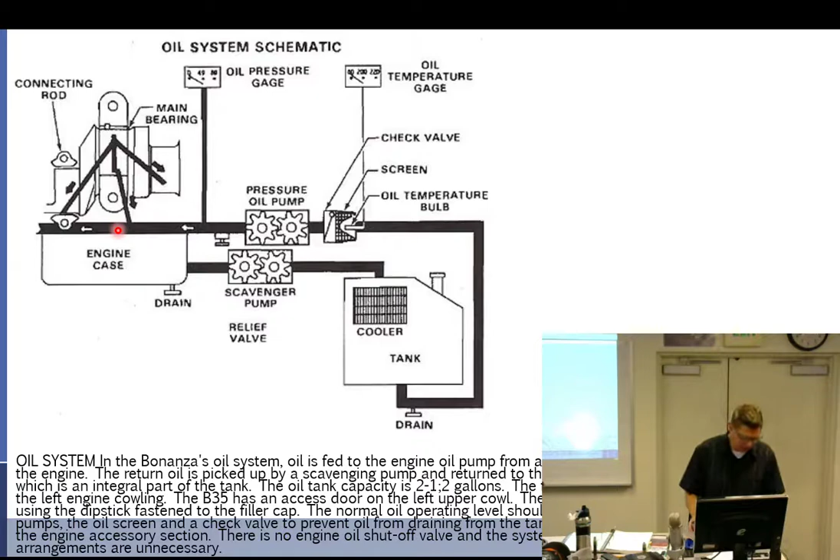So anyway, people call and say, okay, my oil temp's high. And I say, well, probably you just have worn out baffle seals. A lot of people never change them, they're neglected. And they say, no, actually Kevin, let me tell you, I've had it to four mechanics. They've changed the baffling, they've changed the oil vernatherm valve, I've had the oil cooler taken off and sent out and flushed. I have done everything I can think of, and I still have high oil temperature, I cannot get this thing under control.

Well, at that point, I'd say, why don't you bring it in, let me take a look at it. So they would leave it with me, and the first thing I would do is take the bulb out, the temperature bulb, and I told you this, right? And I would get oil, and I'd use a torch or something, but a coffee can full of oil. And I told you, right, with the coffee can, yeah, with my wife's, well, that wasn't my wife's, this was my friend's wife's.

You bring in his candy thermometer, right? We calibrate it, and so we would look at a lot of oil temp gauges. Well, I'll make a square one. Oil temp gauges, they just look like this. It says oil temp.

Red, okay, and then the needle, of course, is right in here. It's over here somewhere, but eventually it's gonna get right about here as they're running. So I would make a card that says OIL TEMP and hand it to them. I'd say, well, when it's at the O, that's 100 degrees. And when it's in the I, that's 120. And the L would be 140. And I would just go through the whole thing and say P is 180.

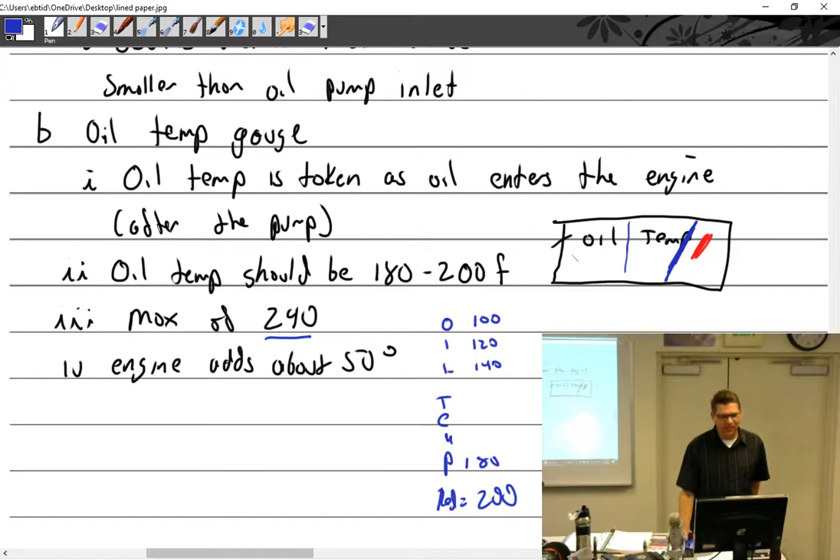Is there a problem there? No, because it could have got up to... so I'd have to call him up and say, we got a problem, your oil's too cold. And then they would not be happy that they had spent all that money on oil, on all these fixes, when it was really looking at the wrong end of things.

So that's just somebody trying to make money? No, actually it was well-meaning, well-intentioned mechanics. The customer probably did have baffle seals that were bad, which means high cylinder head temps that he wasn't finding out. And they saw that, and it did need replacing. After that, everything became a problem: changing out the vernatherm valve, the oil cooler flush, all that stuff. That probably didn't need to be done.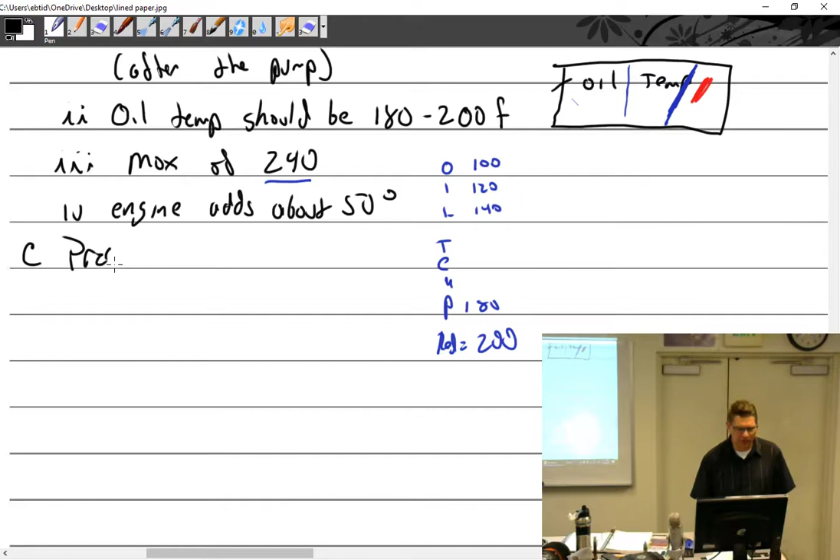But just to say that I never trust those things. Okay, what is it? C. Pressure pump, which is to say the oil pump.

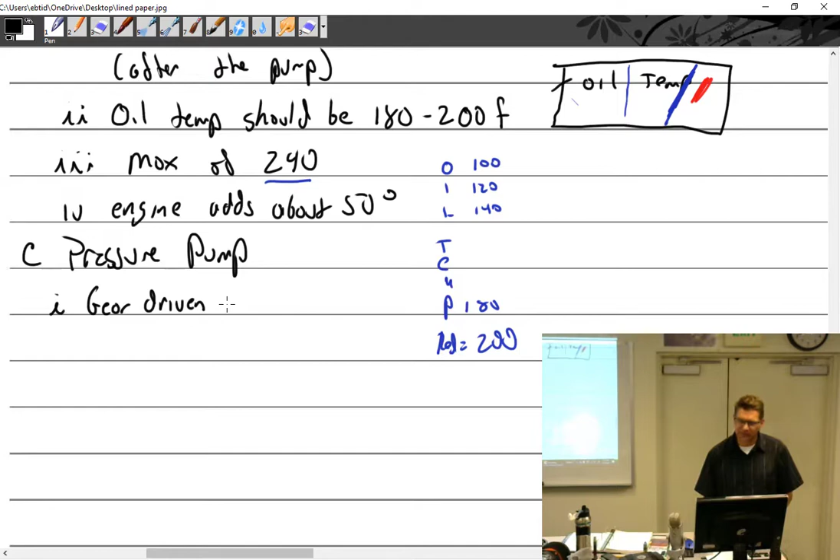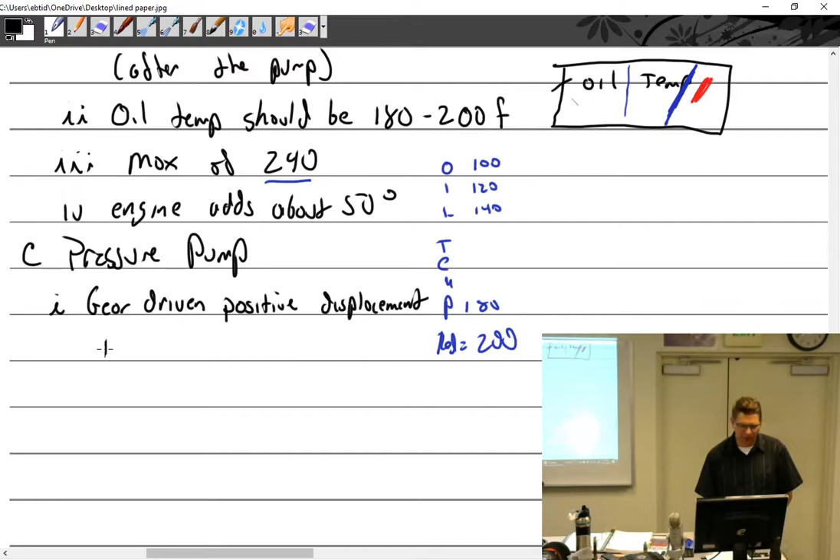A little bit of review here. It is gear-driven. Thank you, gear-driven. What kind of? Positive, or constant displacement. Displacement pump. We talked all about that. In fact, I know this isn't proper physics, but it's what we're doing anyway: it sucks oil from the tank.

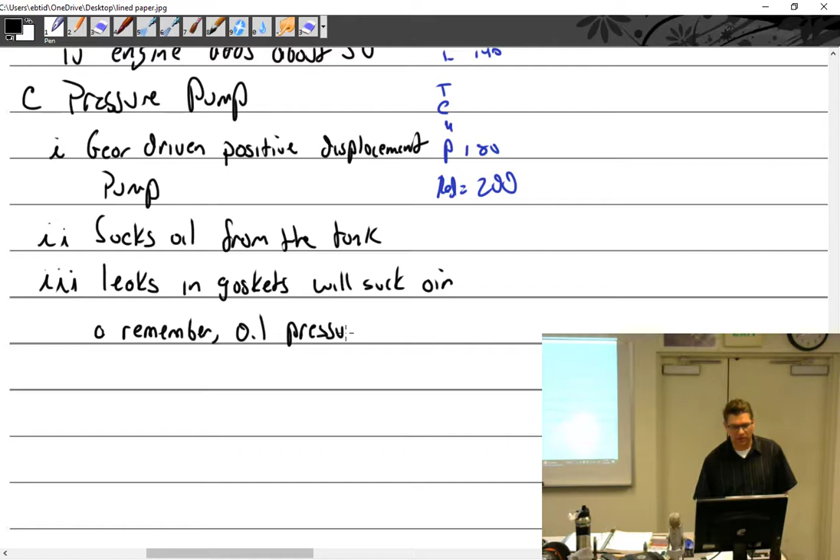That was obvious. Things to think about: leaks. Leaks in gaskets or any seams will suck air. That's not a good thing. So I'll put this down. Remember, the oil pressure gauge just reads pressure, which means it could be oil or it could be air.

It doesn't care, it just reads pressure. So if you could somehow manage to get 60 psi of air in there, it'll tell you that. Yeah.

Say for instance, you know where the suction tube mounts to the accessory housing. I do know that. How would you diagnose that that's where the leak is? Would you have to pull it off and replace the gasket?

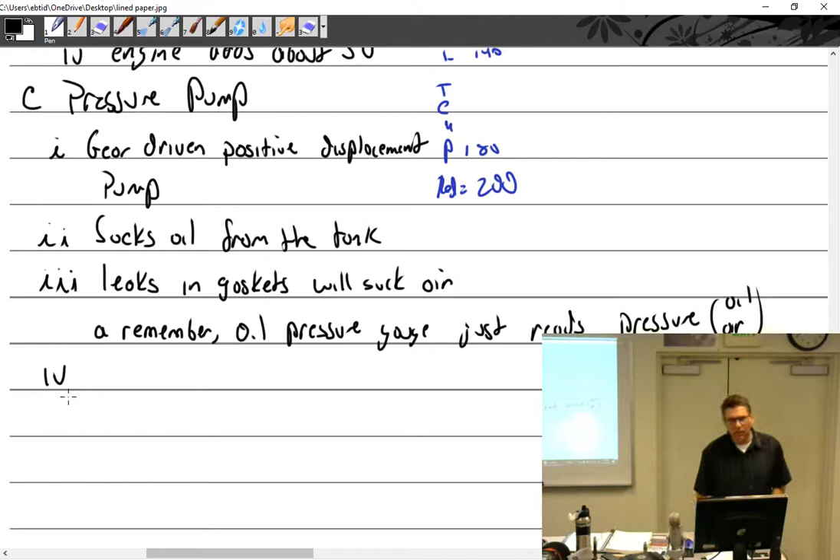Yeah, one of the major problems you're going to have is I can't even think of a scenario right now where you're having this problem of oil and you wouldn't even know. You just don't necessarily know. Actually, I can start thinking it through. So you can start having problems with the propeller not working right. That'd be, I think, the first thing I would notice if I was sucking air.

Constant speed is starting to hunt, it's starting to wander back and forth, and the pilot would complain that the RPM is drastically moving back and forth. Then after that, when it gets really bad, fluctuations in oil pressure, because honestly, the pump is not going to be able to pump 60 psi of air. It just won't, it's not designed to do that. It'll have some air pressure, but you start seeing a fluctuation and having problems there.

So yeah, at that point, I would probably start looking for really foamy oil in the tank, and then I would start looking for air leaks. Well, on your Lycoming, air leaks are going to be quite simple. You guys know there's only really two places you're going to get an air leak on your engine, right? One is going to be that oil pickup tube, two is going to be the pump body itself.

That's it. So how do you get to that oil pickup tube? Well, on a Lycoming, to get anywhere in there, the first thing you have to do is take off all the intake pipes and all of the exhaust pipes, and you have to drop the oil sump.

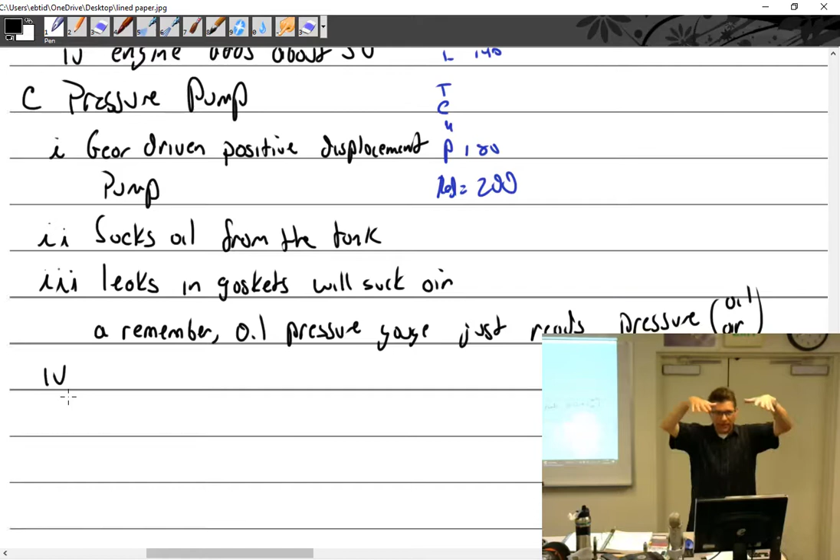From that point, you can see up in there to change out the oil pickup tube, which, by the way, you guys have the old style. The new styles, some of them, are integral into the oil sump, and yours is set up for that. Now, how many people have put their accessory case on? You notice when you put it on, about eye level, there's a big 3/8 inch pipe plug in there. I don't have you take that out, because if you leave that out, you're going to hate your life. We've had people leave those out a time or two. That plug is the optional pickup where it would actually align with the oil sump, and the oil sump had an integral galley going around.

So this pressure pump is still under the required items, or?

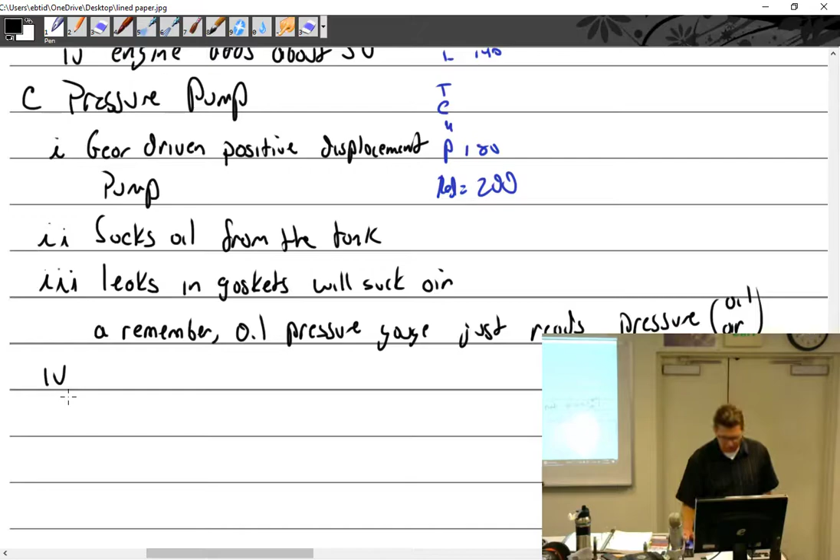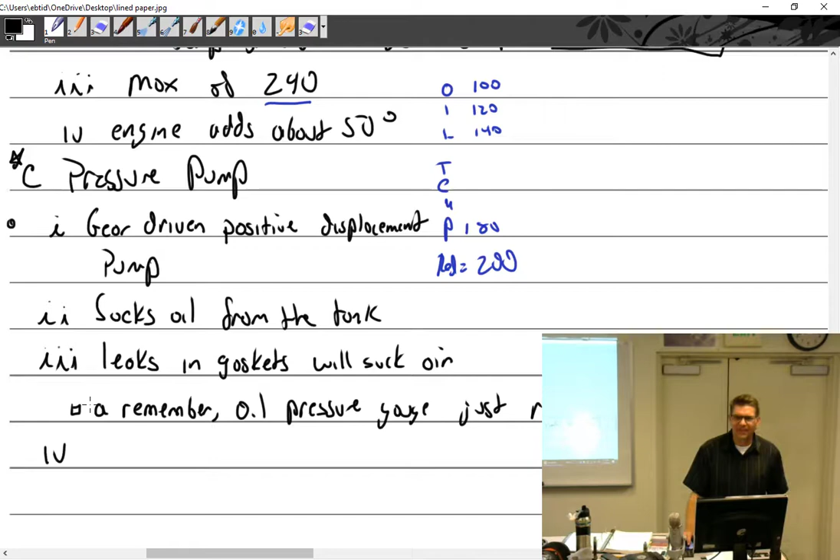No, I moved on, sorry. I probably could have made some numbers. My thing all fell apart here. Sorry, want me to make it a number? No, no, what number would I be on? We'll just, okay, this will be star, and this will be circle, and this one's a square. That's what happens when it all falls apart. Ever since the first day, I just use asterisk. Well, I'm not gonna blame. I sometimes put this stuff away and come back to it months, years later, and I redo it. Microsoft just doesn't want to format it if I start a new section, and I never figure it out. Okay, so let me see.

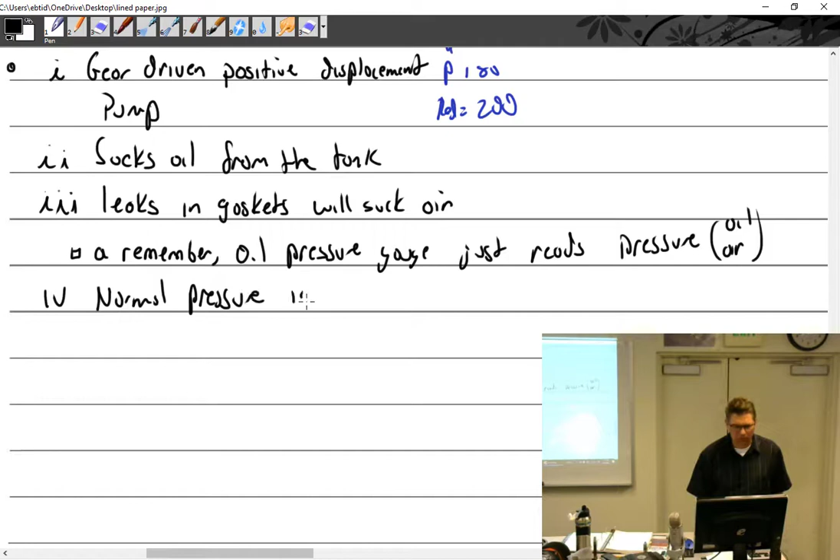Normal pressure, normal pressure is about 15 to 20 psi at idle, and about 60 to 115 psi at cruise. It depends on the engine too. I don't know of any engine that goes up to 115, but that was in a book, so I just left it. Would a dry sump engine have a higher oil pressure?

Same, so think about it. The pressure you want, reading the pressure in the oil gallery, is the pressure being fed to the bearings, right? So why the difference between idle and cruise? Well, quite honestly, that's just the best it can do. 15 to 20 is the best it can do at idle. So if I had an aircraft engine and I built it, did I say 60? Yeah, 60, I'm sorry, 60. That makes more sense, 60. So if I built an engine and started it up, and at idle it gave me 40 psi of oil pressure, what am I going to do about it? Not a dang thing, I'm happy about that. There's nothing wrong with that. That's good. If I can get 60 psi at idle, great, I'm totally happy with that.

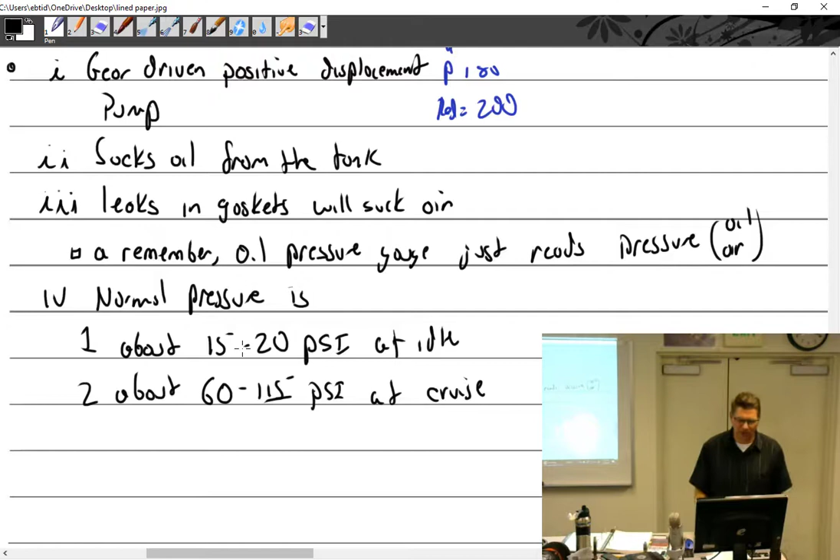But what happens is the engine starts to wear, the pump wears, the engine wears, the spaces get bigger. So the oil pressure starts dropping off at idle because the pump just isn't moving fast enough to do anything better than that. The oil pressure relief ball is on its seat, and the pump is doing the best it can, and all it's getting is 15 to 20. But when you bring up the power and speed of the engine, the oil pump gears start turning faster, filling up the oil galleries, and the oil pressure ball is going to start coming off its seat and regulating and holding it at 60, or whatever you put. 60, 75 seems more normal to me than 115, but that was the number I got here.

So let's see, a couple more points before we move on. Oil travels around or through the middle? Around. All right, so we'll put outside. Outside? No, we'll put around. Around sounds better. Around, not through the gears, so around the outside.

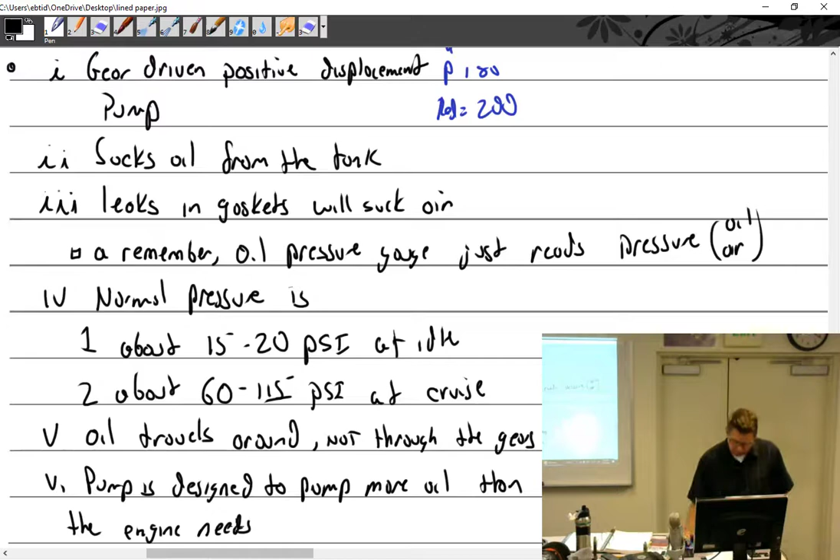And of course the pump is designed to pump more oil than the engine needs, or can handle.